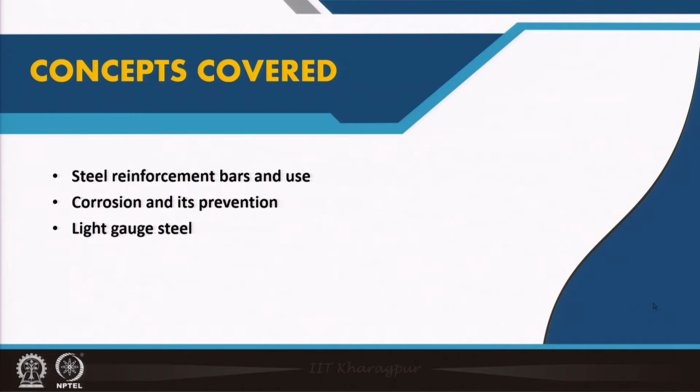Coming to this particular lecture, we will discuss reinforcement bars, corrosion and light gauge steel. Now, reinforcement bars, as I discussed, will be embedded within concrete. Next is corrosion, where we will try to expose the defect or drawback of steel or iron, and we will see how we can actually take care of corrosion, because steel is so versatile in its use, but it has the property of being corroded, and that is a defect. If we can overcome that defect, we can make use of steel in its best way.

And I will try to expose you to another item, that is light gauge steel. This is now in our CPWD specification also. It is not exactly 100% a steel structure, but light gauge steel can be used as a structural member for, say, 2 to 3 storeys high, maximum 4 storeys, and it is a very cost effective way of construction. So, I will just expose you to light gauge steel maybe in one slide, and we will try to finish the ferrous metals.

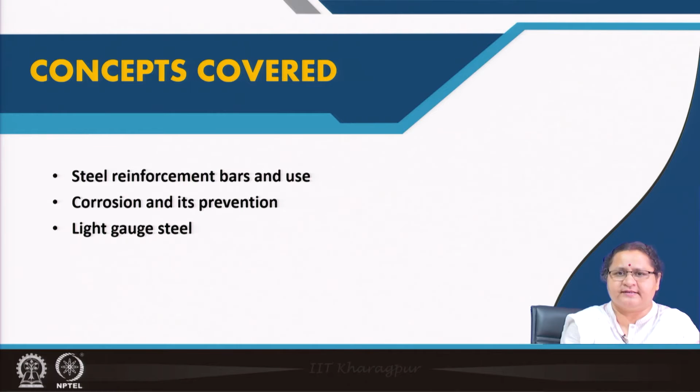So, coming to the steel reinforcement bars, which you many a time see on construction sites: rods, bars which are mild steel having less carbon. They usually start from, say, 2 millimeter, 3 millimeter, 6, 8, 10, 12, 16, 20, 24, and up to 50 millimeter you will get such bars.

In your further classes you will understand the calculation part. Depending on the area of steel required to take the tensile load of any structure, you have to first estimate the area of steel required and distribute it into the number of bars required. Each bar is circular, so you know the area of each bar. You divide by the area of a bar of a specific diameter and find out the number of rods required.

And you have seen in my previous lecture on concrete that a dense network of reinforcement is there before any casting of concrete takes place. So, we are referring to these bars. What is the advantage? These bars go embedded inside the concrete. You won't see in any structure that a mild steel bar is taking the entire load. Rather, you can see an angle section, rolled section, or a tubular circular section taking load. But these are reinforcement bars; they go into concrete for reinforcement.

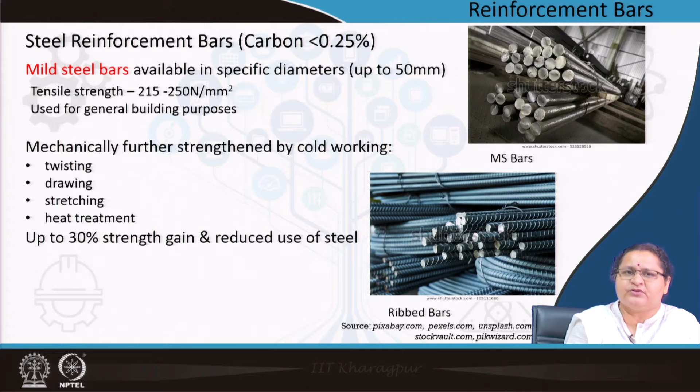Unlike the bars which you see in this new picture, here you see ribs or lugs. These are called cold twisted deformed bars or high yield strength deformed bars. These are mechanically further strengthened by cold working, that is, no crystallization pattern changes inside like hot rolling. So, you are twisting, you can draw it, you can stretch it. Those will give you this kind of bars.

These are high yield strength deformed bars, and they have ribs on top. If it is twisted, it is tor steel bar. So, the bars are having twists. What does it help in? What is the difference between the upper picture and the lower picture? When it gets embedded in concrete, it is very difficult to move this ribbed bar compared to a mild steel bar. You cannot pull it in both cases, but the bond strength between this bar and the concrete will be higher than that of the mild steel bar and the concrete.

So, this is more preferred, and you see the tensile strength for this cold twisted deformed bar is similar. What are you achieving? You are achieving higher bond strength between concrete and steel, and this can reduce the use of steel by a good percentage.

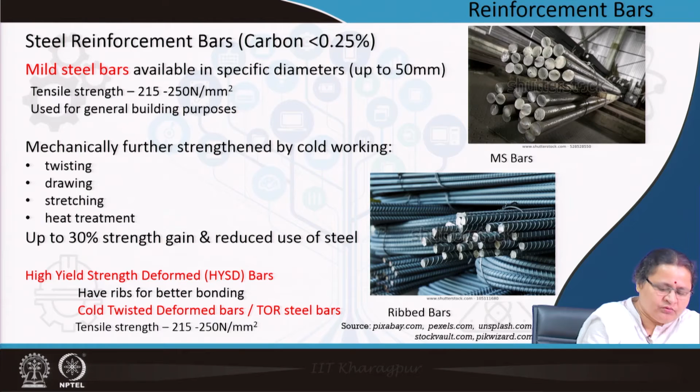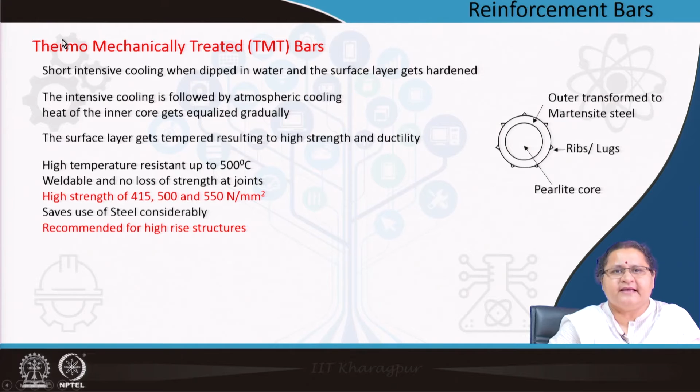Another point you see, written separately, is heat treatment. So, here you see thermomechanically treated bars. Thermo means temperature. So, you are allowing heating to change the mechanical property of the bar.

What is happening here? Short intensive cooling when it is dipped in water, and then the surface layer gets hardened. So, as I was talking of the different types of steel through the time temperature transformation, here you see I have mentioned two. The outer layer, which gets immediately cooled, gets its crystalline pattern changed, whereas the inner core remains in its original form, that is the pearlite core.

So, the outside, which was heated, thermally treated and intensively cooled by dipping it in water, what has happened? The crystallization pattern of the outer layer has changed to martensite steel. Inside is still hot. It is still changing the crystallization pattern, and this gradually cools in the atmosphere. Outer remains martensite, inner remains pearlite, exhibiting different kinds of property. It gives higher strength and ductility, and also high temperature resistance up to 500 degrees centigrade.

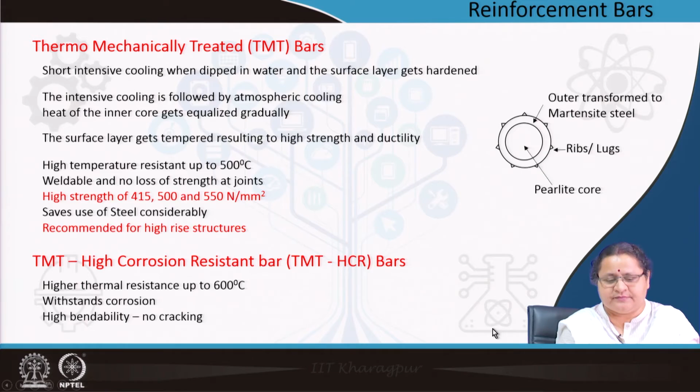So, all these types of bars go embedded in concrete, unlike the rolled sections. So, what is the advantage of these bars? They are not exposed to the atmosphere directly, and that helps keep them in an environment away from the atmosphere and thus prevents corrosion.

So, we open this slide titled corrosion, which is a very common phenomenon which all of you know. I am 100% sure you all know rust. We see iron items and we say, oh, it's rusted. What is that? It is the oxidation that happens to the body in presence of oxygen in the atmosphere. We cannot take oxygen out of the atmosphere. So, these rebars embedded in concrete have the added advantage of not being exposed to oxygen.

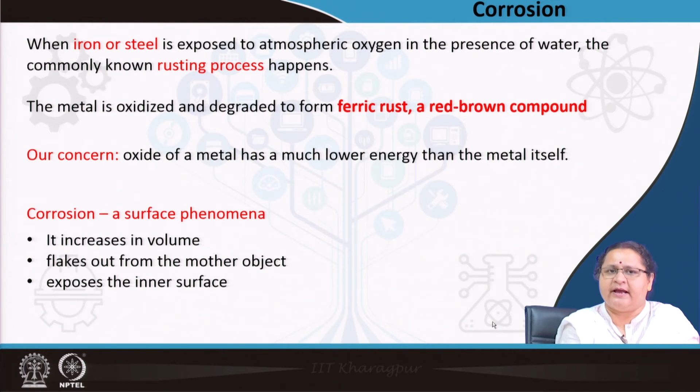Because our atmosphere has water also, water vapor also. So oxygen, carbon dioxide, water, all three with this iron, through the different chemical reaction stages, go on to form this rust, which flakes out, exposes the inner layer, and further rusting happens. So we need to take care of it.

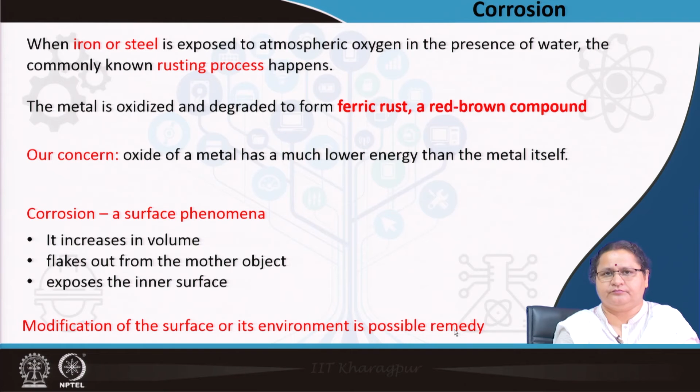So, what can we do? We can prevent it; we can modify the surface or change the environment as a possible remedy. Let us see some pictures. You see the first picture here. You see the layer is flaking off, which I have told you just now. See, these are the flakes, that is, the upper layer is coming out and exposing the inner layer. So in the next stage the inner layer will get corroded or rusted.

You see here a pipe has been painted; inside is iron, which is getting rusted by entry of water vapor or leakage. It may be a water carrying pipe, it may have internal leakage from where it is getting water as well as air as well as carbon dioxide, and the rusting has happened and, because it has increased in volume, it has pushed the layer of paint and the paint layer has come out, and adhered to that paint layer is the iron oxide flake. So that is coming out.

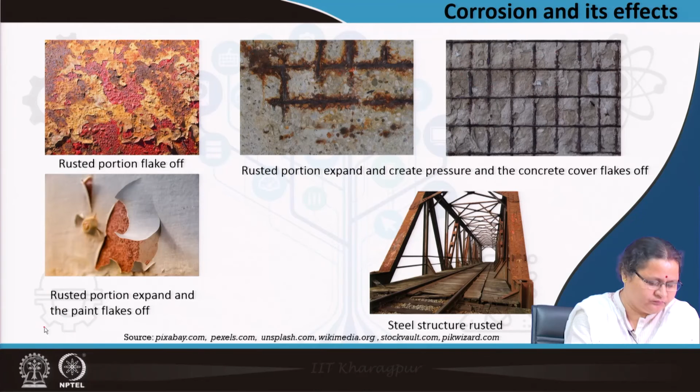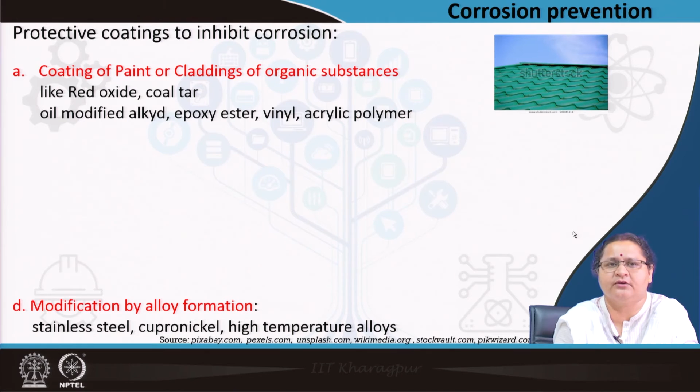So corrosion has a far reaching effect on a building, even if the reinforcement, the steel or iron, is embedded. So we have to be very careful about that. So, we can protect by coating. You can see the picture of a roofing where it is coated. Coating with paint, red oxide is the bare minimum, or with coal tar, that is jet black, but if you paint you are rid of corrosion, rid of rusting. You can have oil modified alkyds, epoxy esters, vinyls, acrylic polymers. It is a cladding; you are putting a dress on top of the iron member.

You can have plating: electroplating with nickel, tin or chromium, mechanical plating with metal powder, and the other is galvanizing. You all know galvanizing usually involves zinc, where zinc as a molten metal is coated on top of the iron object, and zinc actually reacts with the atmosphere. Zinc has a very slow reaction with the environment and hence it protects the mother material. So you are doing a metal plating on top of a metal to prevent its oxidation process.

Anodic coating is another, where aluminum oxide prevents corrosion. The surface is subjected to a chemical or electrochemical process. And you have already noted alloy formation. You can have stainless steel, cupronickel, high temperature alloys made with steel as one of the components or the major component, and you can actually get corrosion resistance. However, we find coating and plating very easy processes; alloy formation etc. is practiced but not much in the building industry.

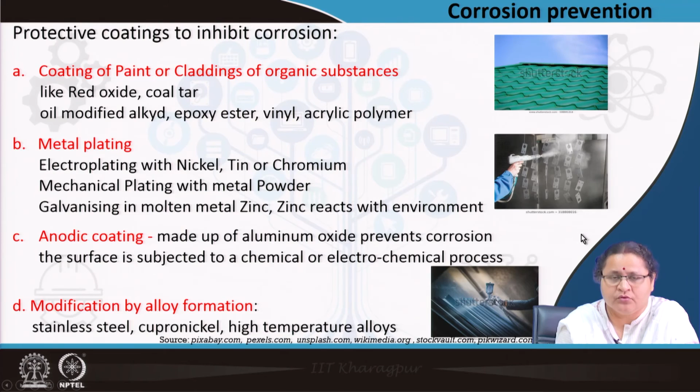We also need to know the temporary methods. As we had talked extensively of rebars, if you visit a site, you will see lots of reinforcements lying here and there, clustered together.

So, how to maintain those? Say they will be used in 1 month time. So, will they be exposed to the weather and let them be corroded, or should there be some temporary methods to prevent them from corrosion? First important point is to keep them raised from the ground. You can just put brick as a support below at an interval and raise the entire steel bars and keep them free from the ground, so that the water is not coming in contact.

Then you brush the exposed parts, whatever you can see, with a cement slurry. Why cement slurry? Because later on it will be embedded in concrete, where cement will be one of the components. So, it does not need to be taken out, and you are only putting it on the exposed part. You are not opening and individually painting it with cement slurry. You are putting or dabbing cement slurry on top of it.

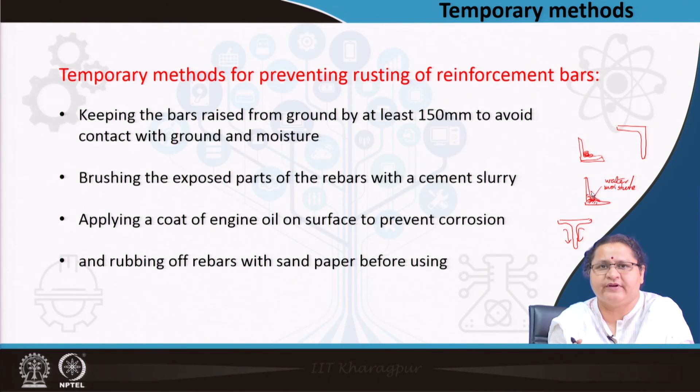So, a clear instruction should be that these sections should be placed in such a way that water accumulation is not possible. Even dust accumulation is to be avoided. We have to be very particular on this point of corrosion. If we can actually check the corrosion, then we can do good justice or use of steel in the building industry.

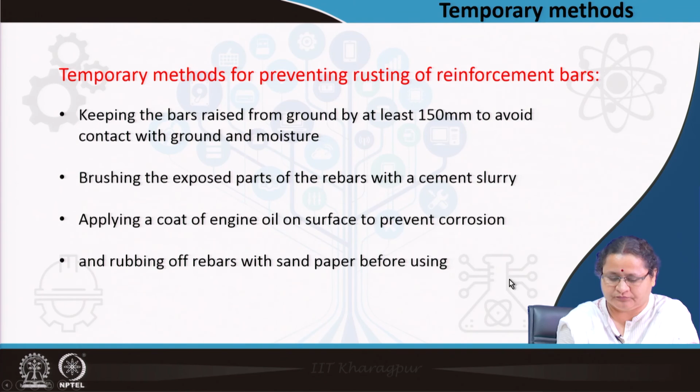Now coming to a brief on light gauge steel. BMTPC, which I have already discussed in a previous lecture on precast items, has now introduced this item in our Central Public Works Department specification. So, light gauge steel uses steel structure instead of our regular concrete, making the structure light in weight and cheap. These are nothing but C sections, that is, channel sections

which have different slots on the web, this is the web part. It will have slots on its web at different levels, that is floor level, sill level, lintel level, where it can be bolted with its perpendicular horizontal member to create a framework, as you can see in the picture. And just see the dimension.

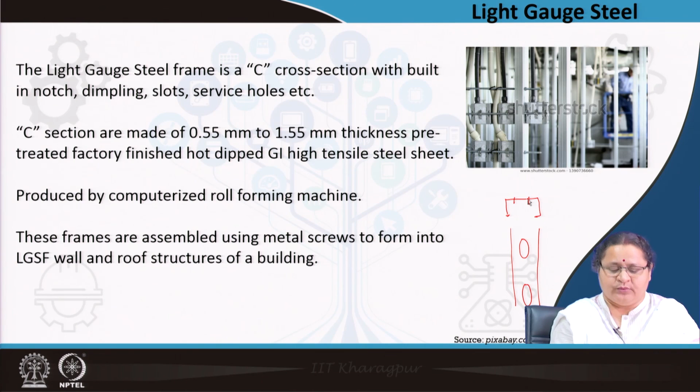Yes, organizations are making them, but we do not have a light gauge steel production factory. So, we have to import it from outside, hence it is not that cost effective, but yes, if we actually start building with this, we can get cheaper lightweight structures. With this, we finish the ferrous part, and in my last lecture of this particular module, we will cover the non-ferrous metals. Thank you.